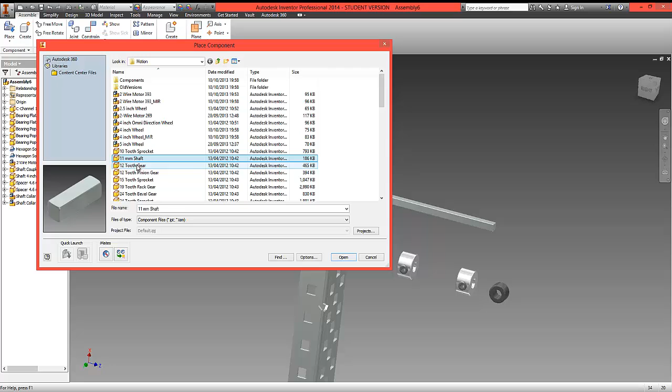Go to the motion folder, locate the shaft collar, bring 2 of these in, and then choose place. We're going to locate a small 12 tooth gear, open this up, and again bring 2 of these in.

Now you'll notice the way I've arranged these is in the order we'll assemble them onto this shaft here. So let's begin with a simple constraint onto the flat surface, and then again we're going to choose to constrain the center line to the center line of something on the axes.

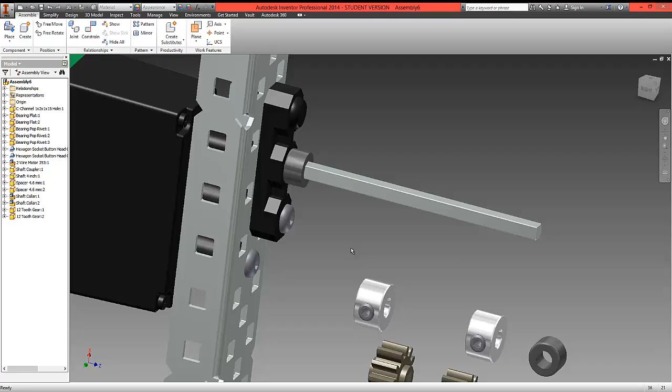With the first one in place, it's now just a repeating process. Once we place the first 3 parts in, so the washer, then the gear, then the collar, we're going to then constrain the next collar, and we're going to leave a gap.

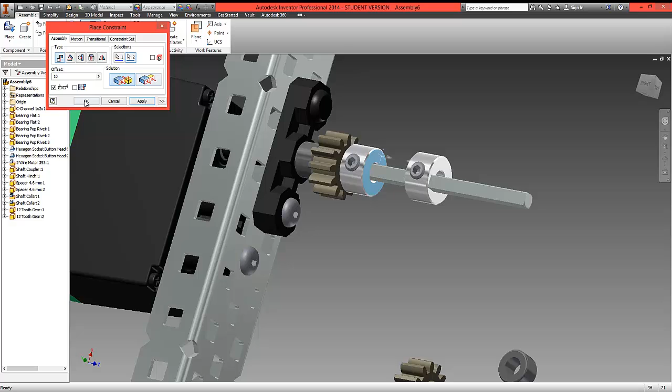So what we'll do first of all is we'll mate these 2 surfaces, and we'll leave an offset of 30 millimeters. And then again what we'll do is we'll constrain the center line to the center line here, and we can adjust that distance later on if it doesn't seem quite right.

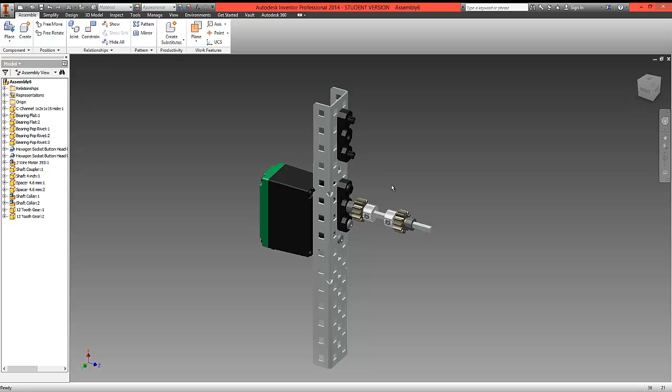Let's continue with our constraining, and once all the parts are in place, we can now just review and inspect that and just make sure it looks correct. Our next task is to bring in a single collar.

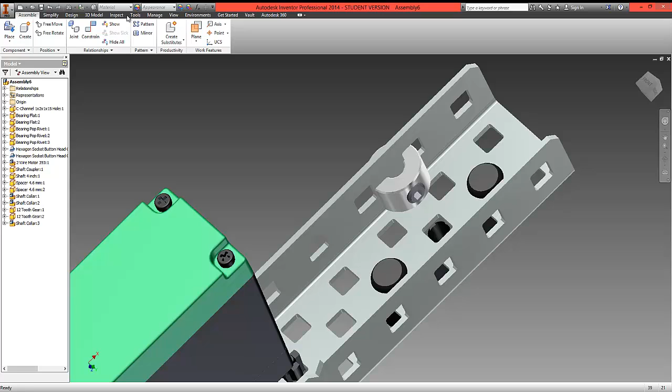We're going to rotate the metal round. What we're going to do is constrain the flat surface to the metal, and what we're going to do this time is we're going to constrain the center line of the collar to the center line of the hole, and select OK. This has now fitted the collar in place.

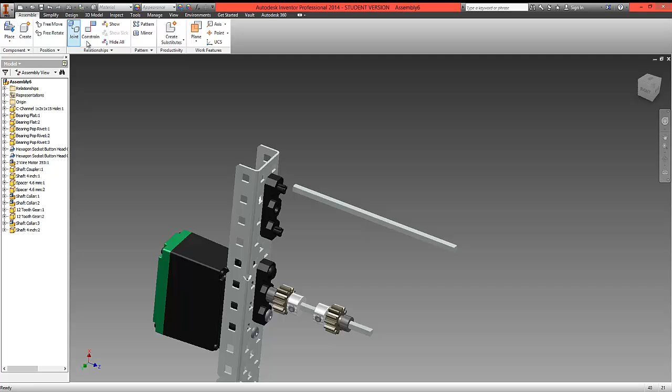Our next task is to place another shaft, again 4 inches, and bring this one in. In this instance we're going to choose the constrain option, rotate round, and we're going to match the top edge of the shaft to the top edge of the collar and make sure that they sit in line with one another. Then we're just going to leave this loose for now, and we'll add further constraints to it later on.

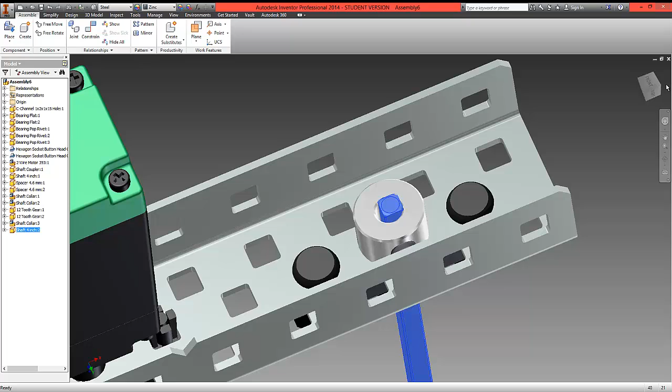So what we're now going to do is fit a bearing onto here and then fit the metal on. So let's go place. We're going to locate a flat bearing and bring 2 of these in and select OK.

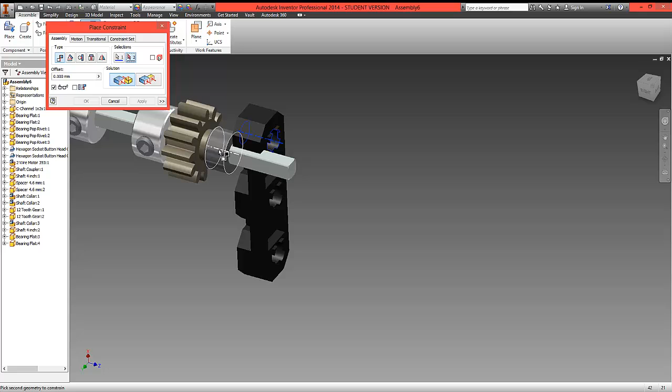And again what we're going to do is first of all constrain the flat surface here onto this flat surface here. Select OK. And we're also going to constrain the center and the center there. Select OK. This will still spin around, but for now this is constrained sufficiently.

Let's now repeat this up here. This time we're going to constrain the flat surface here to this flat here. I'm going to sit these side by side, so these are now lined up.

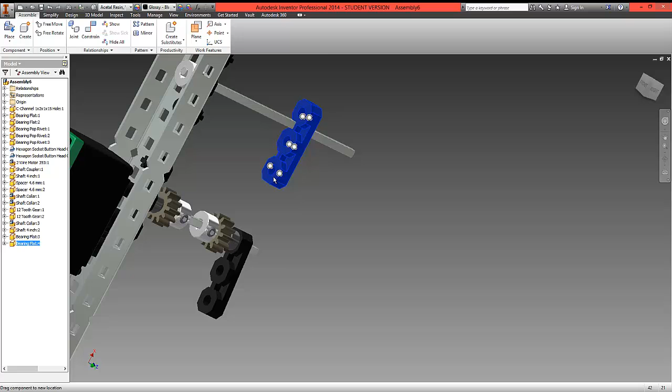And what we're going to do again is we're going to make sure that the constraint for the center line here is matched to the center line of this collar here, like so.

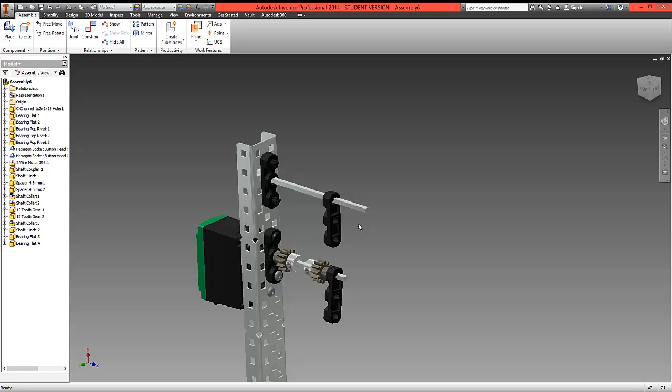What we can now do is place the second part of the metal. So if we go to the structure folder, locate another 15 hole and bring this in.

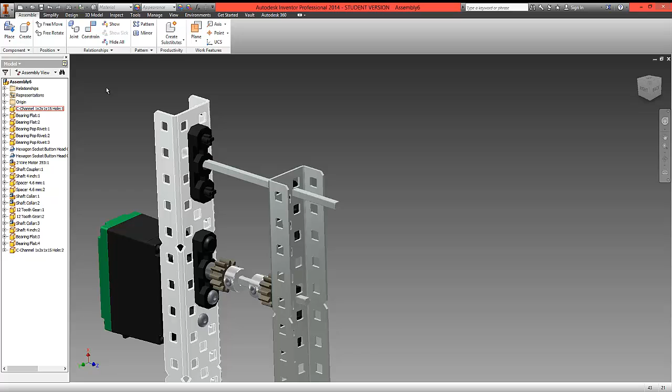We're going to constrain this surface to this surface here. Select OK. We're going to constrain this edge here to this edge here, and just make sure that it's sat as an alignment.

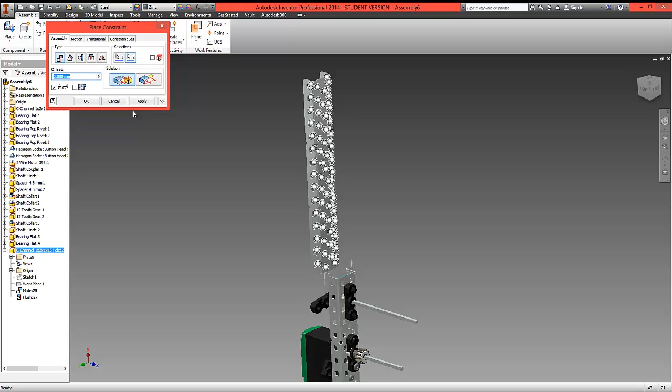Select OK. And then last but not least, we're going to select the top edge here and the top edge of this metal here, and again choose to align. Select OK. Now what should have happened here is that these 2 pieces of metal now sit parallel to one another.

So let's get a better look at this. And what we have still is 2 bearings that will spin round, and we're now going to choose to use the insert mates to just lock these in place, and then click those into place like so.

So we should now have a full tower assembly. Currently this bar will still move freely around, but that's not a problem at all. And this tower is now ready to save, so let's just save that now.

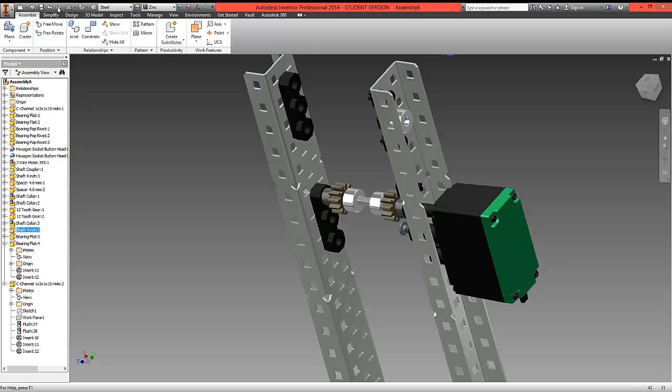And we'll give it a suitable assembly name. So we'll call it assembly 2 to couple with our assembly 1. Select yes all and select OK.